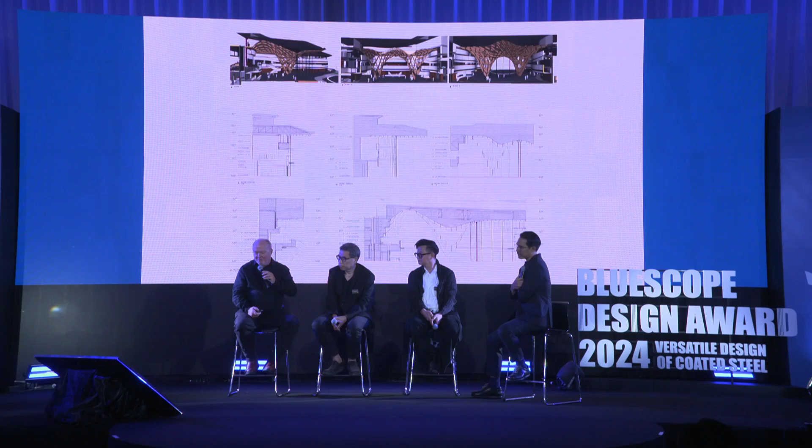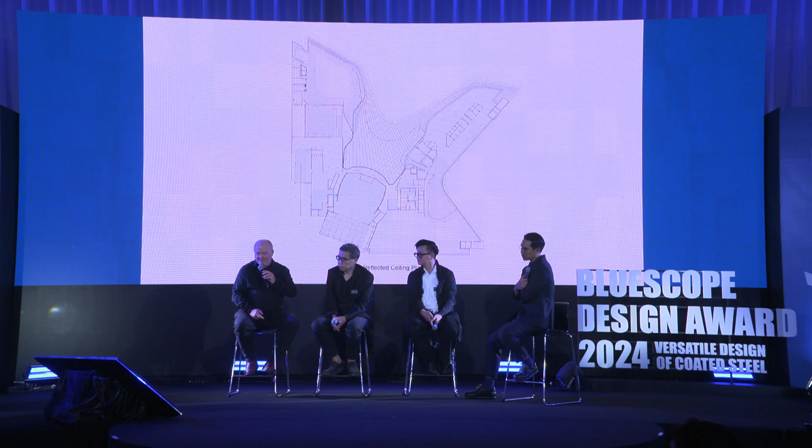From that we came up with this design, which, as I mentioned, is probably 6 years old now, a very innovative timber building. We wanted that to hold the roof and really be part of the foyer, so you can see that crisscross area there in the middle. That's the timber, and then the building wraps around the central theatre in the middle, library, black box theatre, gallery, community centre and function space.

So the timber here was made in Germany. It's impressive, came from sustainable forest. And you can see these presses.

The challenge with this building was the timber. It's bent in 3 directions, so most timber can bend easily in one direction. Three-dimensional curvature, this was the first that was designed like this. So it was all made in Germany, and they shipped it in containers, and it came across in true German, beautiful, organised fashion.

And here we are during construction. As I said, it was a very complex build, the first of its type in Australia, and we were learning as we went as well. We spent a lot of time working with the builder. It's the first time anyone had done a lot of this stuff, including us.

The white is a product called Stowe. It's a Swiss product, an applied plaster-like material. It's 7 layers, so you don't get any joints, which was pretty important for us. We had these ribbons which tied through the building as well.

From this kind of timber structure, you then incorporate the coated steel to deal with the surface on top. Did we work with this kind of timber structure as the structure of the whole sheltering wings, and then incorporate the coated steel on top of that? Yes, we did, and it was important because weight is very important with this building. The timber is highly stressed, so the steel is incredibly flexible but also lightweight, and we couldn't have done it any other way, I don't think.

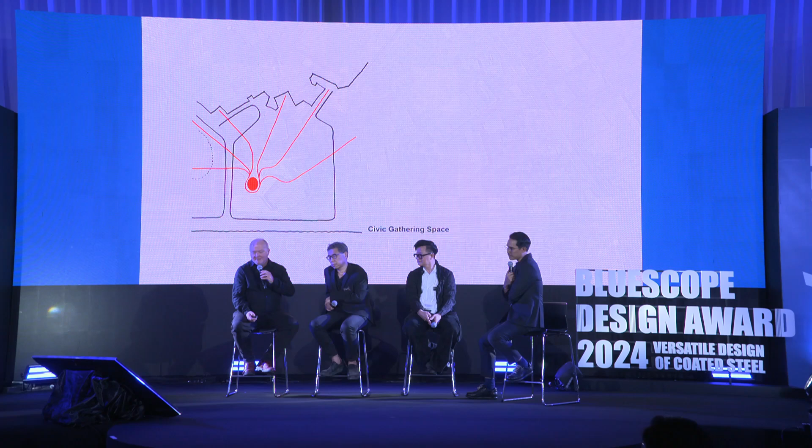So here's the central hub outside, and then here's the building. That's an amphitheatre, and we did the landscape as well. You can see the steel roof there, two layers with a thin edge, which allows the natural lighting to come through.

It does, yeah. Okay, here's the opening day.

It's been that busy from day one. It's amazing really—they have a lot of events there, food stalls, weekend markets.

This is the Indigenous group doing the Bunjil dance, which the building is named after. They prepared that specially for this event. These are the kids afterwards having a great time.

And here we are here. Then they have movie nights, etc.

And then inside, you can see this connection. We were very, very keen not to have a hierarchy of spaces—the library was as important as the gallery, as important as the theatre. So the foyer is accessible to all points equally. That was an important part of the design process.

You can sort of see how this sits in there. Then you can see the form, and this is the space—the library on the first two floors.

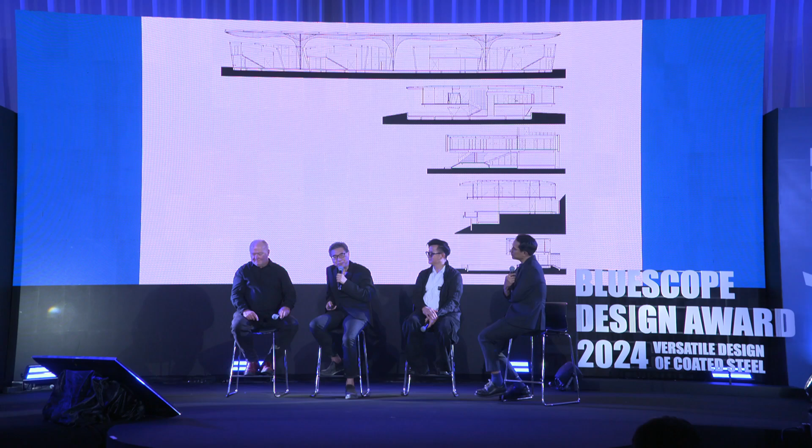So when we look back to the project, our office is really fascinated with the cantilever. We try to use many methods to do cantilever. For example, the one below is a house which is a 5-meter cantilever using only concrete beam. After that, we tried something else—this time we think maybe we might use something light, so it can be a longer cantilever, right? So that one is a house in Samui, the upper one.

This time we use steel and something very light on top of it, so metal sheet is the best material here. We put metal sheet on top, and this may be a 6-meter cantilever with a steel structure. The upper one is another method that we use to do cantilever too.

This time it's an office, the PTT office in Phitsanulok. This time we use post-tension, taking about a 6-meter cantilever, and put a very light structure on top of it, and of course we use metal sheet for the roof. I think it's really very good to use that kind of combined structure.

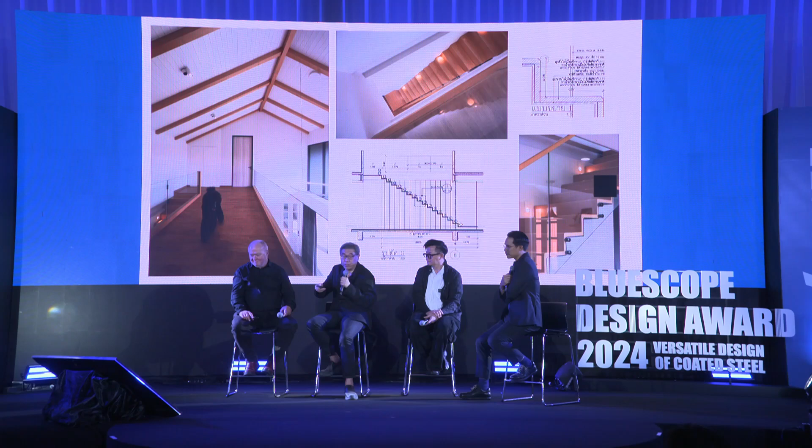And even in the bedroom, they have skylight. People always ask why they have skylight over the bedroom, but the owner wants it. They want to see the stars at night, and I asked them, "Are you not afraid of the sun and heat?" They said it's okay because they wake up before sunrise anyway. So okay, up to you.

Up to you. That's what I'm about to say. But it's good. I think if they love it, okay. I don't mind. It's okay to me. And another kind of skylight. Maybe they wake up later now because they have kids.

I think so. Okay, even in the bathroom, we provide the light. Okay, I think it's almost 1 hour. I went very quickly through the skylight.

And the last property of the metal sheet is the innovation of form, meaning it is flexible. You can put it in any form, and it's quite easily adaptable to the form of a building. You have a complicated form like this, and metal sheet is one of the materials that can match the complex form. It's easy to join and easy to modify. Here is a sample of the mall in Saima, and some work for the Frameline office.

And the last project is also about form and the metal sheet. It's a winner of the BlueScope Award for 2023. It's the Bunsong Osot office. Bunsong Osot is known for Thai herbs. They use Thai wisdom to produce modern medicine from herbs, right? So when we did the new office for them, we thought, why not do the same, use the same Thai wisdom and apply it to a modern building. So we bring the traditional Thai house to the modern office.

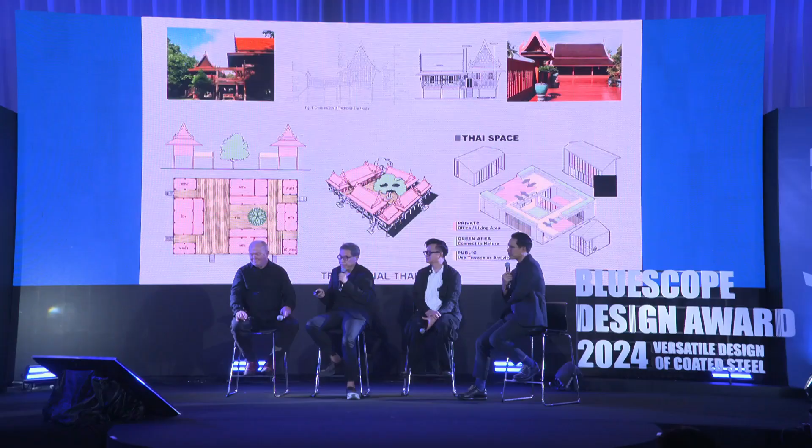The traditional Thai house, as a lot of people know, is raised from the ground to avoid floods and animals, and it's separated into smaller sections combined together with a big terrace that we call chaan. We do the same for the new office, trying to apply all of them to the new office.

So here we separate the functions of the project. It has a lot of functions: office, living area, warehouse. We combine them into one building by putting the warehouse at the back and creating a courtyard between the living space and the office, connecting them with the big terrace, the pink one below here. And we try to make it suit the Southeast Asian tropics by providing good ventilation and light.

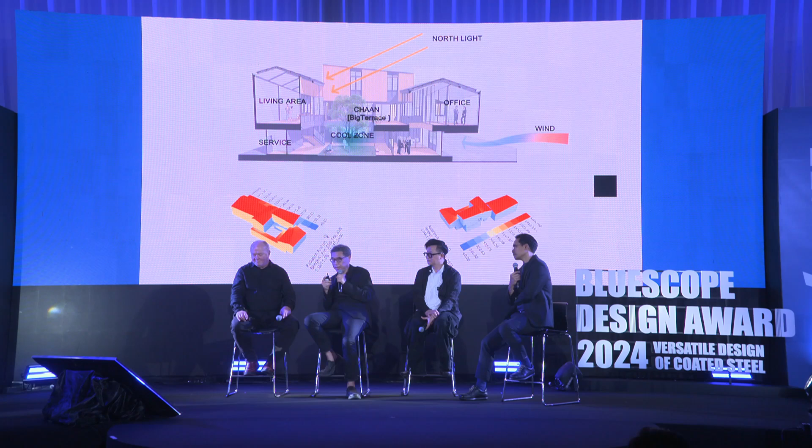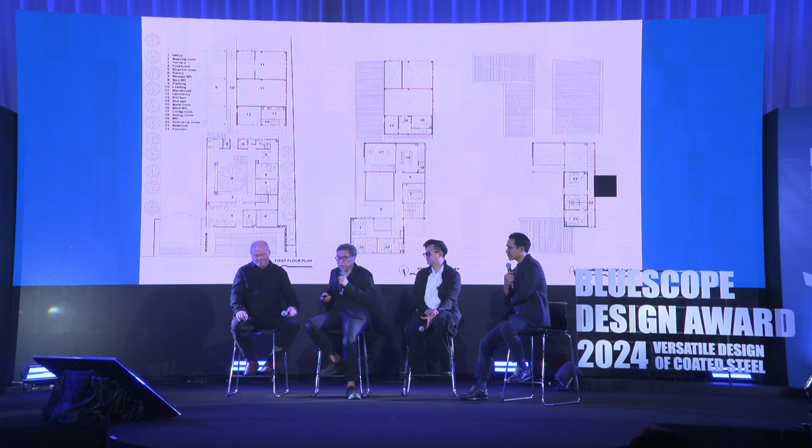We did radiation analysis of the project to see where it is exposed to sunlight, something like that. And the plan, I can go very quickly because you see it in the diagram already. It's a house, living area, and the warehouse. And the roof shape is important here regarding form and the ability of the metal sheet, because it's actually a gable roof, but we rotate the ridge line to make the form more interesting, like a new kind of Thai house, not really copying the traditional one.

So the form of the roof changes from every angle. If you look at the project from the entrance to the back, the shape keeps changing because it is not symmetrical. So it keeps changing depending on how you look at the project.

Inside the project, you can see we use metal sheet not only on the roof but also on the walls. Some of the sections. And similar to the last project, this metal sheet can combine with other materials and create a welcoming feeling and a more homely look for the project. It's combined with wood, metal, something. I think it's a nice combination.

Courtyard, I think its time is up, but I can run it very quick. Courtyard, and we provide a security wall. The upper floor is a terrace from which we can see the temple nearby. It reflects in the glass. And the courtyard is a connection space and a flexible space for people, not only circulation but informal meeting. And the stairs, we provide stairs for the living area separately as well.

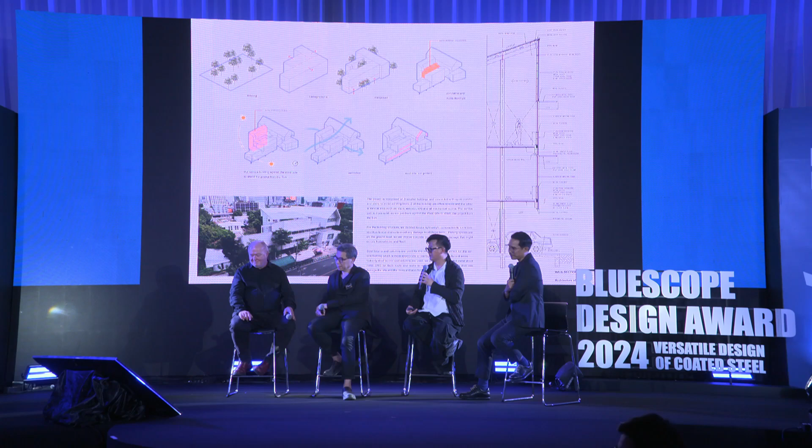So we did the section on the right-hand side. The wall doesn't sit on the floor. It's offset from the floor. So when the water comes in, it leaks and goes down to the ground floor without getting into the space. So the wall hangs. Yeah, the wall hangs outside a little bit, and when the water leaks, it goes down. So we used the technique that I used in Seattle and applied it to this building. Yeah, time's up. So basically, this building got an award, and I'm grateful for that. And the building actually doesn't turn on any lights until 5 or 6 o'clock because it's very bright inside, with good ventilation. Our office.

To go on with this one? Yeah, because the land is worth more than the building. So they changed the type of project. Yes, now it's a condo. Okay. Yeah, but I already finished the construction drawing for this. Got the money? No, not yet. That's sad. Yeah, I think that's pretty much it.

But anyway, according to this slide, I think it's totally related to my question, because of your wide range of experience both in Washington, the U.S., which also has a lot of rain, and also in Thailand. The leakage problem and how you cope with that kind of problem. Do you have any suggestions?